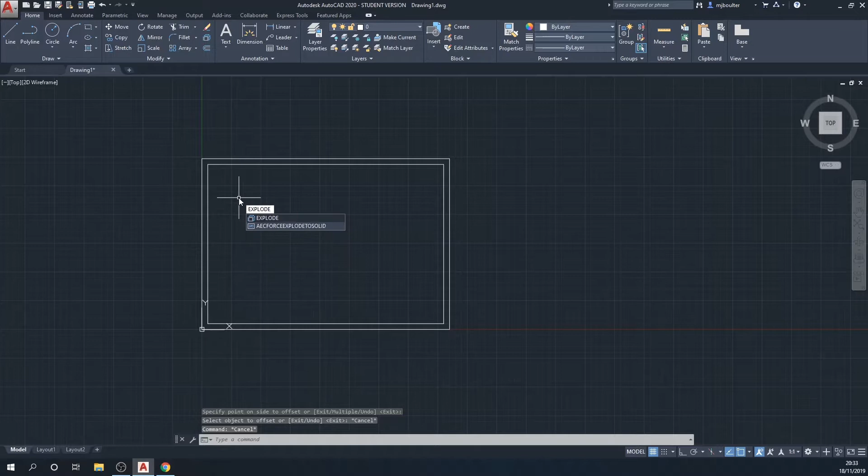I'm going to offset the rectangle in by 10 mil because we need a 10 mil border on top, right hand side and the bottom. So I'll offset that in, and then I'm going to explode that inside rectangle so that I can offset the left hand border in by another 10 mil, so that overall we've got a 20 mil border on the left hand side.

I'm going to trim out the bits on the left hand side so that we've got that 20 mil border. So I'm just going to quickly trim those.

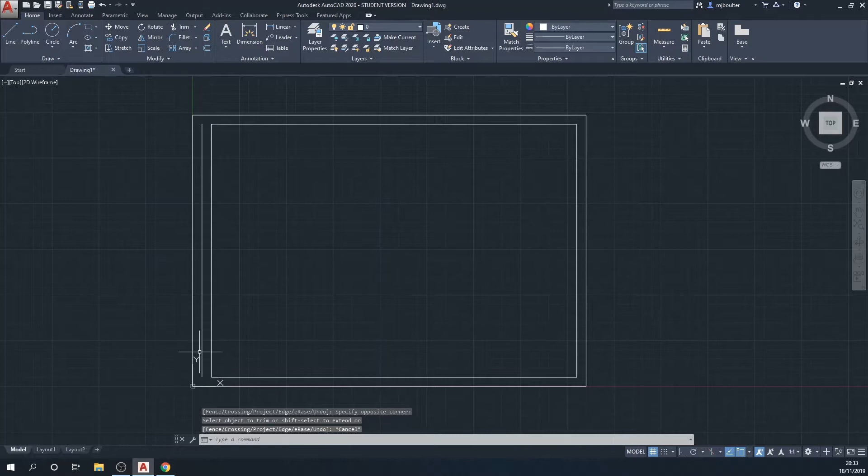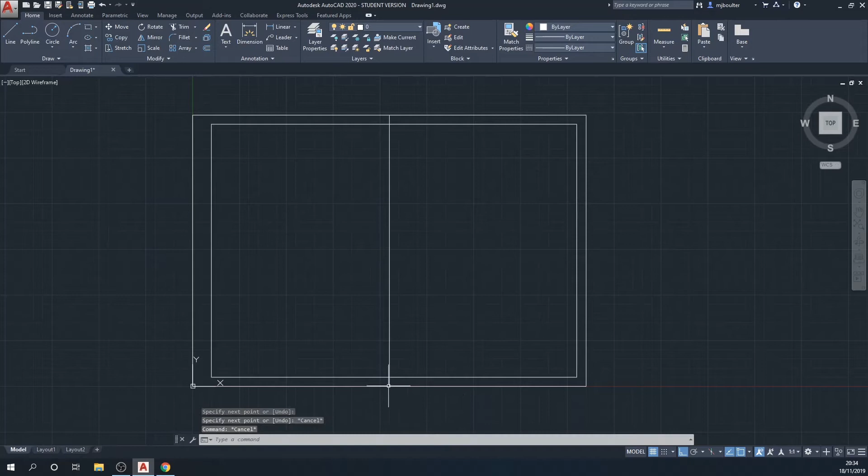There we go. And what I'm going to do now is check for my object snaps, my midpoint, make sure my ortho mode is on, and I'm going to put a vertical line and a horizontal line at the midpoint of the outside rectangle.

We're then going to offset those through 50 mil. I'm going to start with the vertical ones, offset to the left, and then I will offset them to the right. Now I'm going to do the horizontal ones, and I'll go up 50 mil.

We're going to use these to put our numbers and letters, numbers across the top, letters down the side. So I'm going to join the inside rectangle so that I can use my EXTRIM function, joining these lines together.

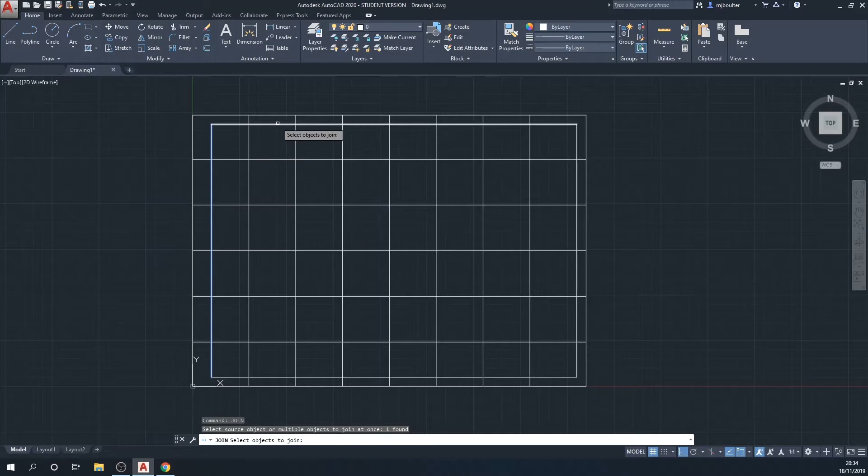Now I'll be able to use the EXTRIM function, selecting the inside rectangle as the trim detail, left click, and then just left click inside the box and it will delete that.

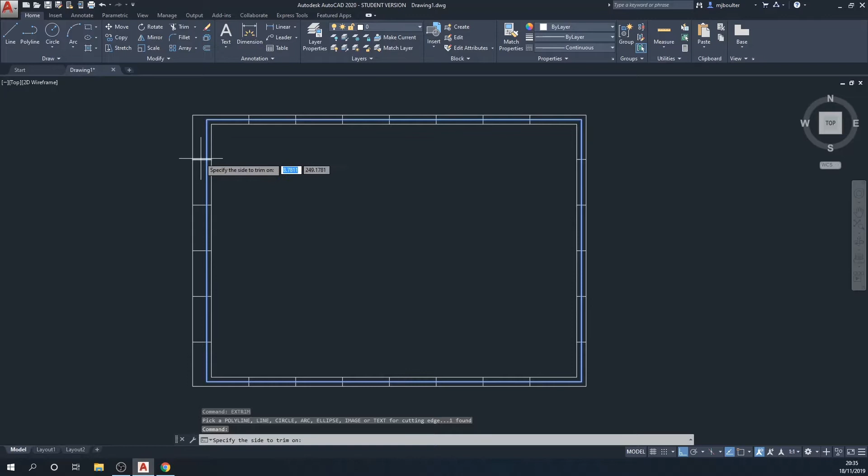I'm now going to offset the inside rectangle by 5 mil, and then I'll use the EXTRIM function to trim out the little element between the outside and that rectangle. I'll then delete that rectangle we've just put in, and there we've got the little 5 mil indentations to denote where our letters and numbers are going to go.

So I'm going to use a multi-line text. It's in the drop down of the text selection box. Select that, and then I'm going to justify that into the middle center. So along the top with numbers, I'm going to go along and put multi-line text boxes in all of the rectangles, numbering 1 through to 8, justifying all of them to middle center.

I was just trying to see if I could copy it there, but I think it's going to be easier if I just carry on doing the multi-line text.

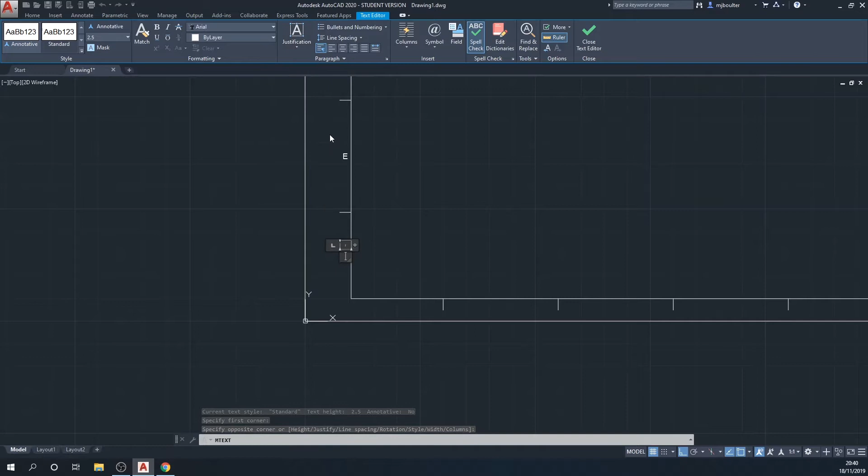So last one to do now, because we'll copy them across. Now I see that I've put two E's there. I will change it in a minute once I've done the copying across.

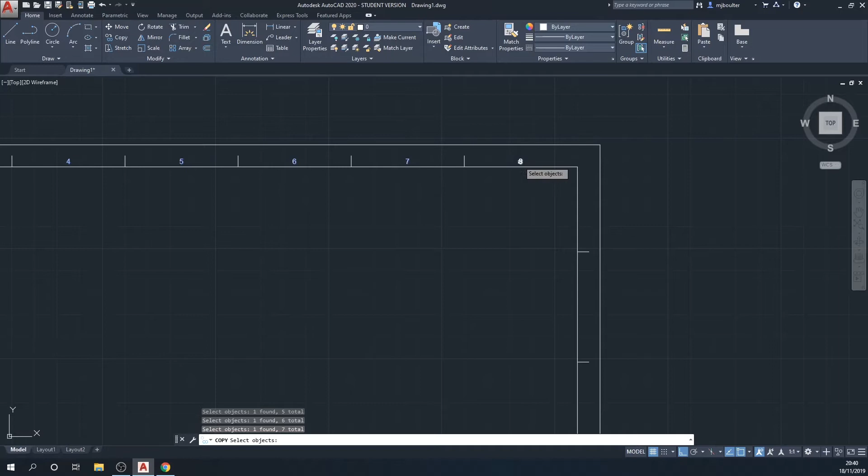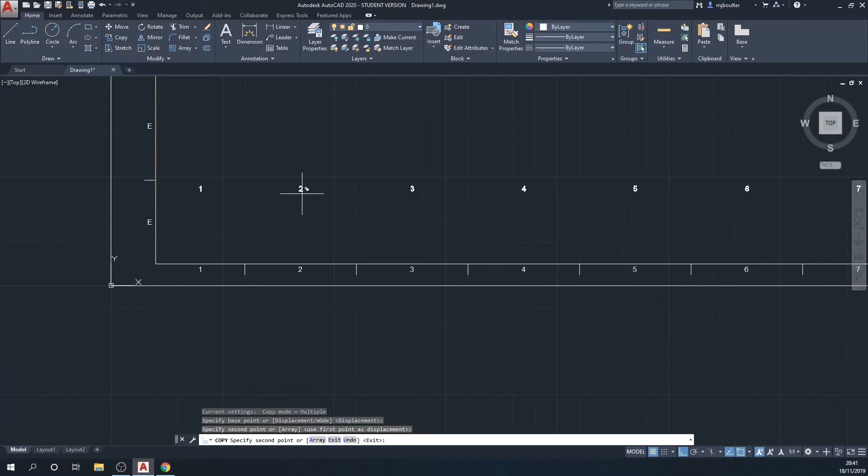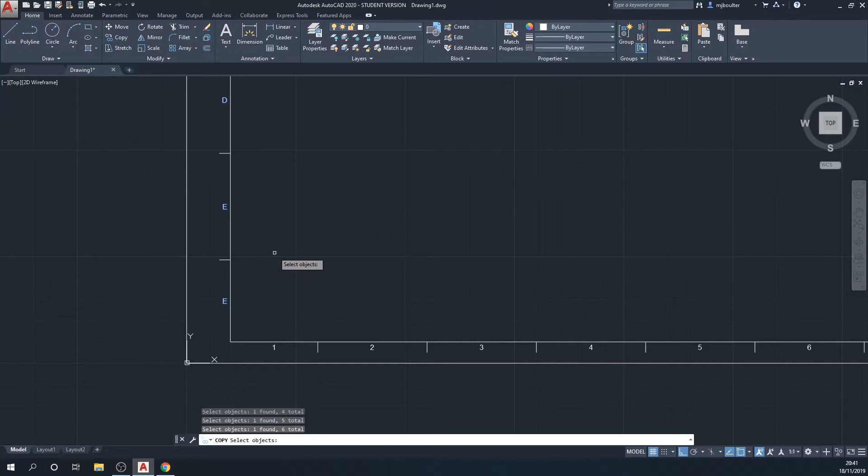And now what I'm going to do is go back and change these to F's. Just double click on them and you'll be able to change it to an F. We'll do that side and we'll do the right hand side.

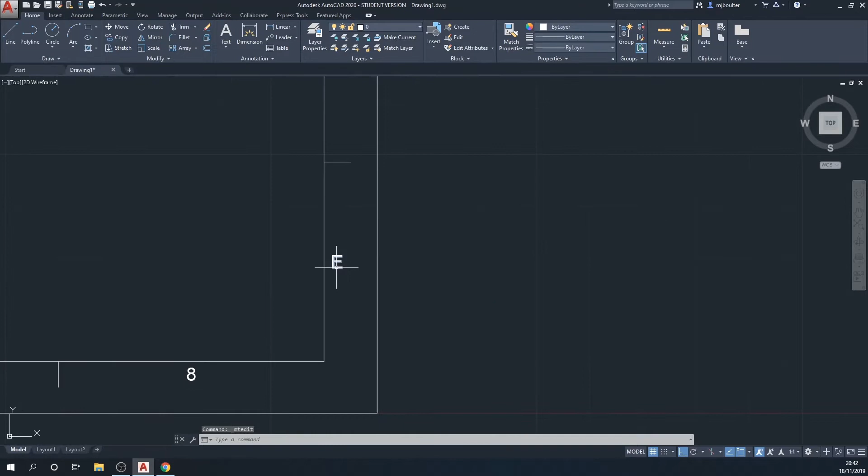So now we need to go on and do our title block. So our title block is another rectangle. This is 180 by 30, but of course we're going back, so it's actually minus 180 by 30. And that will give us our title block.

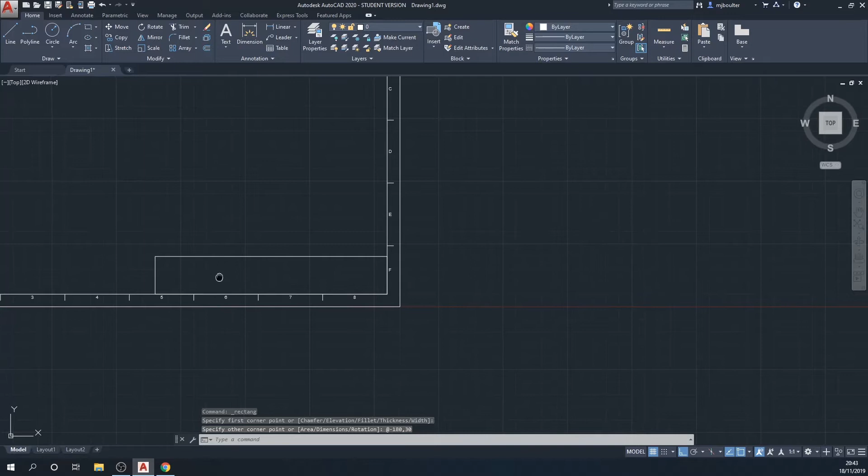I'm going to put in the various offsets now, so I'm going to put a vertical line and then I'm going to do shift right click and use a temporary track point to track in the distance 30 mil and then come down. That creates that rectangular box.

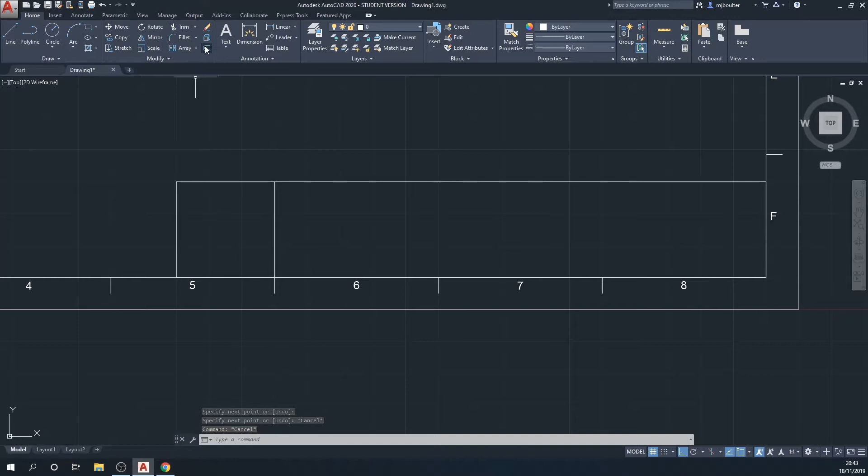I will now use the offset command and I will offset this line in by 40 mil.

I will then offset this line by 35 mil. And then we've got a series of 15 mil offsets, which we'll trim out in a bit. We're going to have 1 15 mil, 2 15 mil, 3 15 mil, and the last one 4 15 mil.

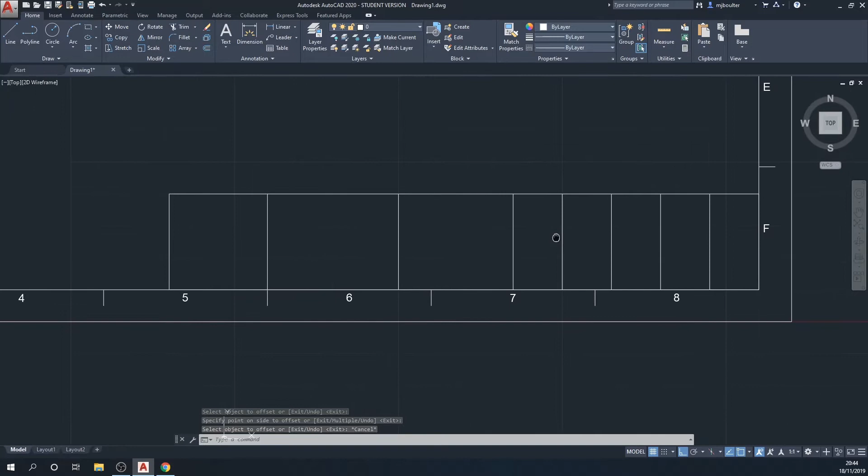In the second box in, I'm going to use a temporary track point again, so shift right click, come down 10 mil and then across. I'll then offset that by 10 mil.

And then I'm going to put a horizontal line through the entire box at the midpoint, and then use the trim function to trim out some of the boxes where those lines aren't needed. So just copy what I'm doing here, copy which boxes need to be trimmed out, and we'll put in our various different titles in a minute.

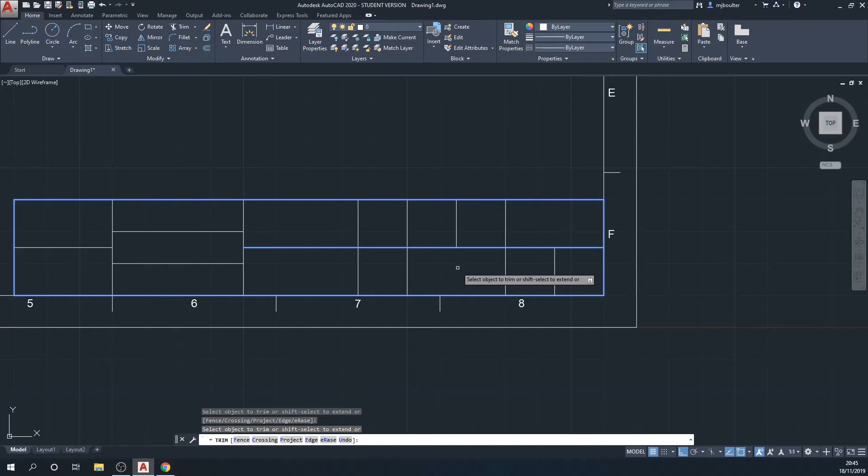The box on the far left here doesn't need a line in at all because that's where our logo is going to go. So we can now start doing our multi-line text again.

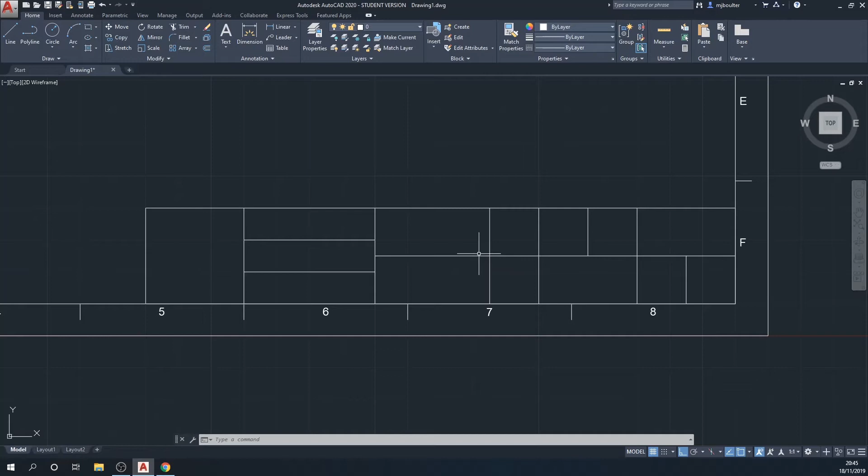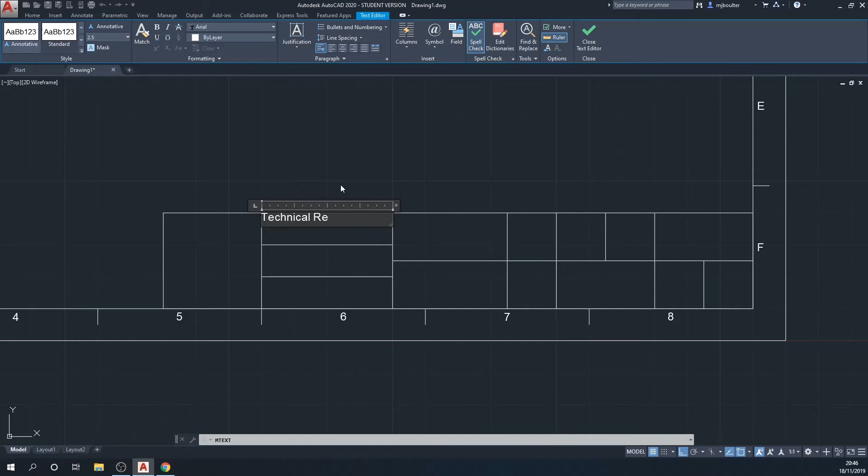So we'll select multi-line text and put a multi-line box into the top here. We're going to keep the justification top left, and we're going to put in 'technical reference' with a capital T and capital R, but the rest lowercase.

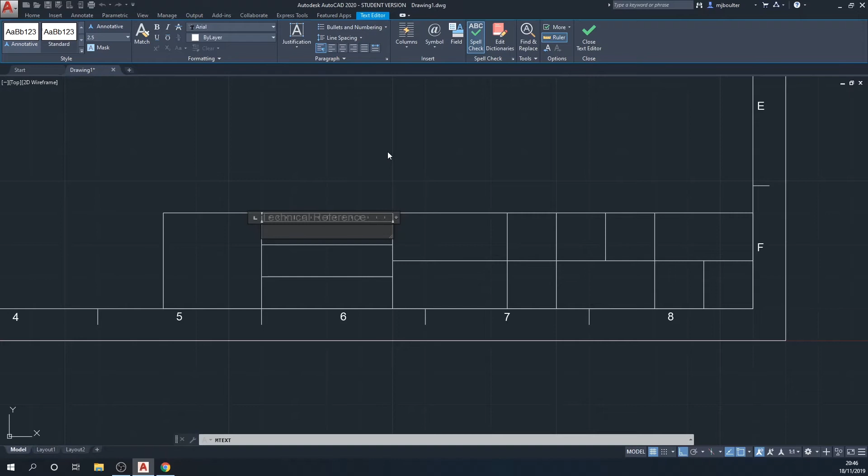And then we'll do another multi-line text box. This one will justify to the left and center, so middle left, and here I'm just going to input the word 'name' in capitals.

As you can see, they're tight up against the corner, but first what we'll do is change the text height of the technical reference from 2.5 to 1 mil.

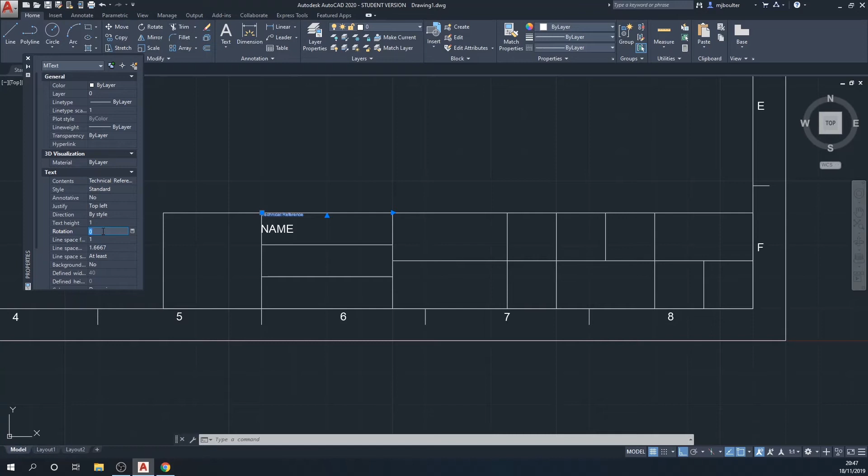Close that window down, and now we just need to move them in because they're tight up against the border. So we'll click the point, move it in 1 mil and down 1 mil for the technical reference, to get it off the border. For the name, we'll just bring it in 1 mil.

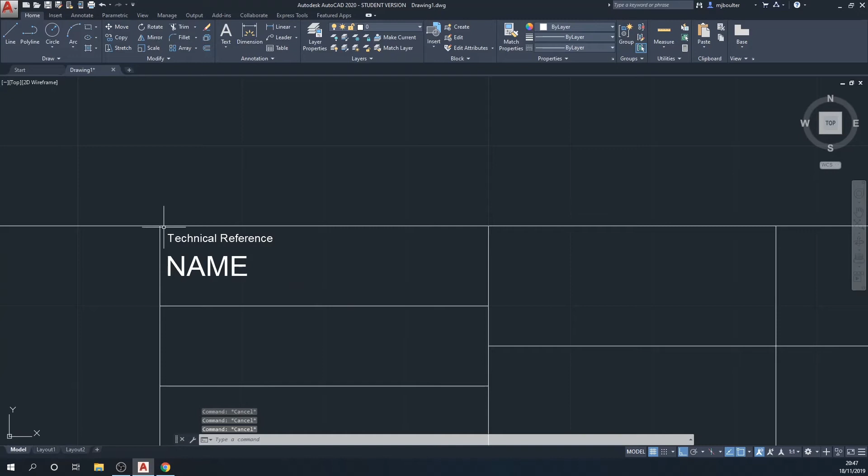Now what we're going to do is copy that into all of the rest of the boxes. So we'll select the corner of the box, and then go around copying them into all of the boxes. Then in a minute we'll come back and change the title of the box.

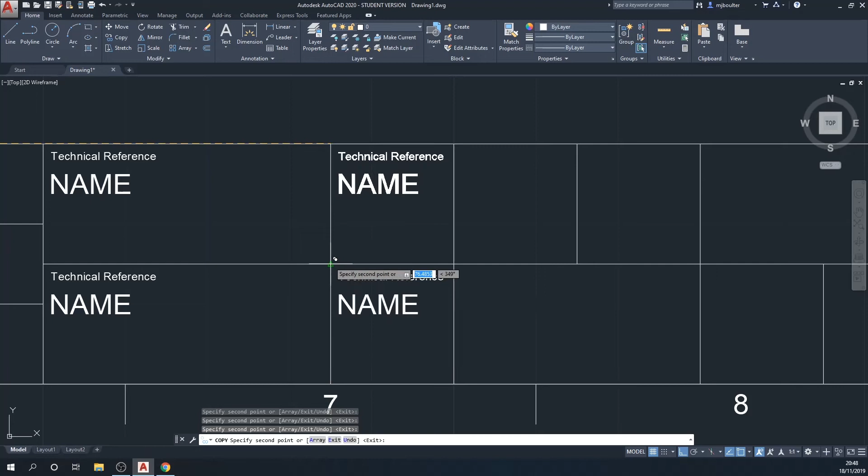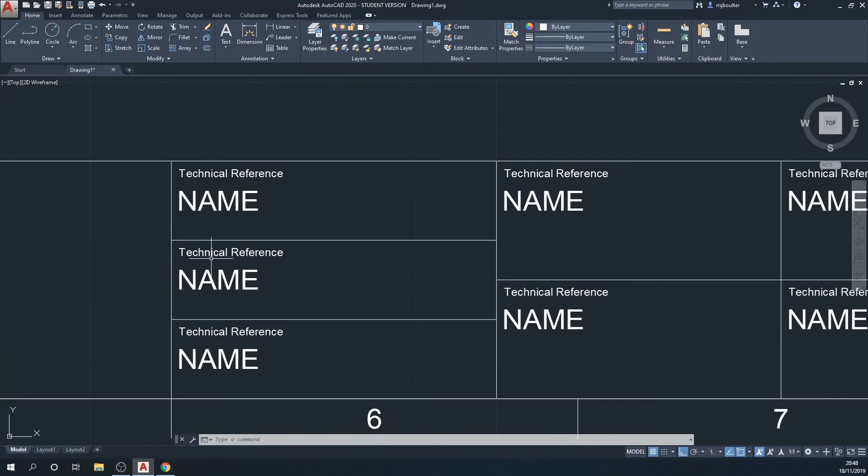There we go. So the second box down, we need to change this to 'created by'. The next box down, we need to change that to 'approved by'.

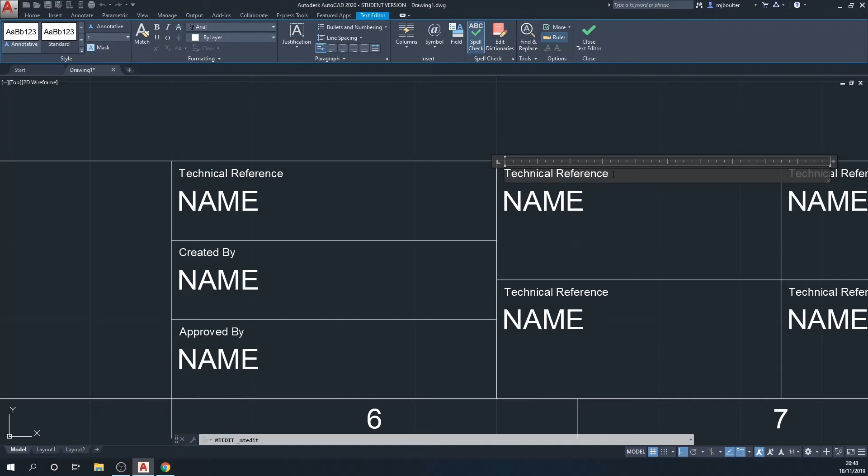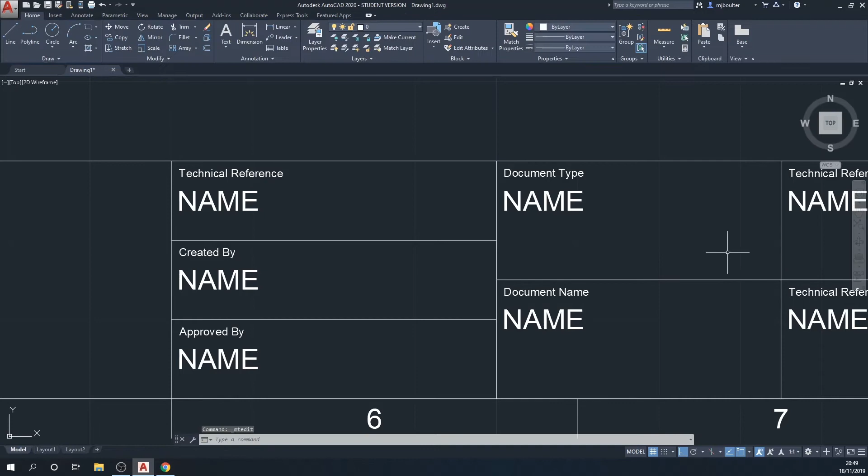Then this next top box will become 'document type', and the box under that will become 'document name'. Now this next top box will be the 'size'.

Then our revision box underneath. This box will become our 'scale'. This box we're going to delete, because that's going to be our third angle projection, which we'll have to draw in a minute. But the box underneath will be 'date'.

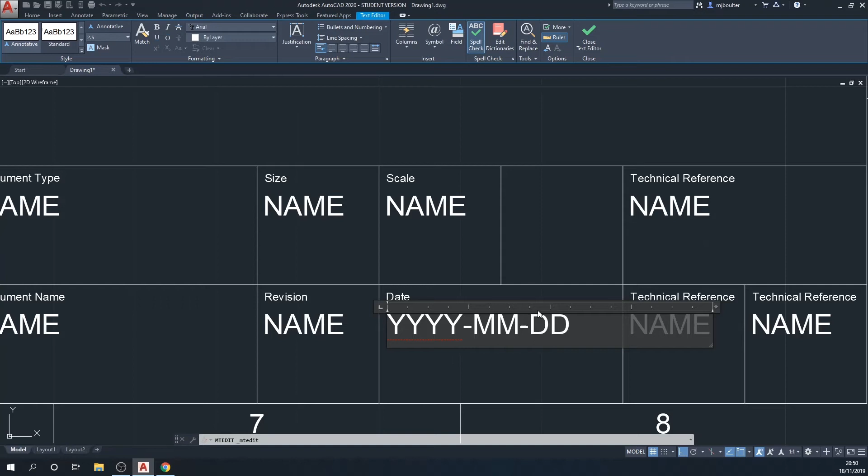And I'm actually going to put in there the format it needs to go in: the year as YYYY, so 2018, 2019, whatever it is, then the month, so 06, 07, and then the day. The final box along the top here will be our part number.

And the last two boxes along the bottom here: this one's 'language', and the box next to it will be 'sheet'.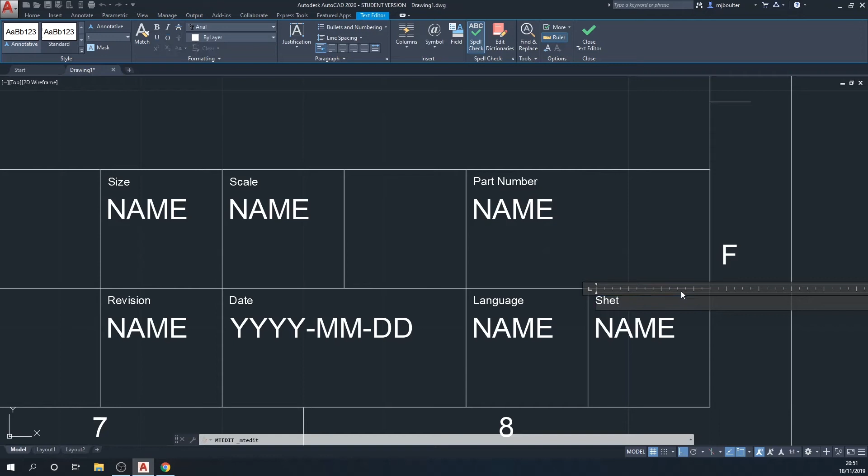Now I'll leave the names as the same. I'll just keep them as 'name', so it will remind you that you need to fill it out when you've done your drawing. But the next section, what we'll do is look at the logo and importing the logo.

So I'm going to go over to Google and select our logo. I'm going to use the City College Plymouth logo. You want one that fills the area, so either a PNG or JPEG. So I'm going to save this to my hard drive.

I think I'll just put it in downloads for a minute. Save it. And then what I'm going to do is go and find that file in File Manager, and I'll right click on it and open with Paint.

Now what I'll do is a Control A and then Control C. Control A is select all, Control C is copy. Come back into AutoCAD and then press Control V, which will then bring it out, and I'll then place the image.

I'll go to Properties. I've got to unlock the aspect ratio, so that needs to say no. The width and the height, we know it's 30mm, both of them, because it has to fit in that box. I can close that down, and now I can move it into that box.

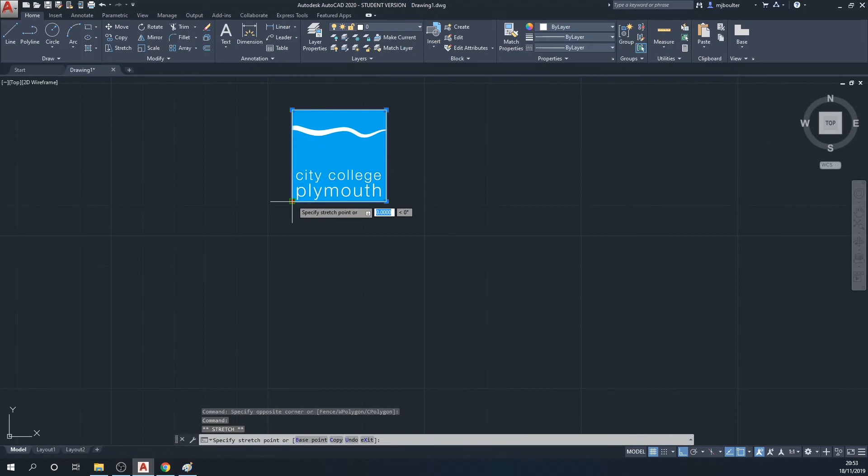Oh, shouldn't have done that, so we'll Control Z that, go back. We'll just select and move the bottom left hand corner, and then copy it into that box there. So the last thing we've got to do now to fill this out is our third angle projection.

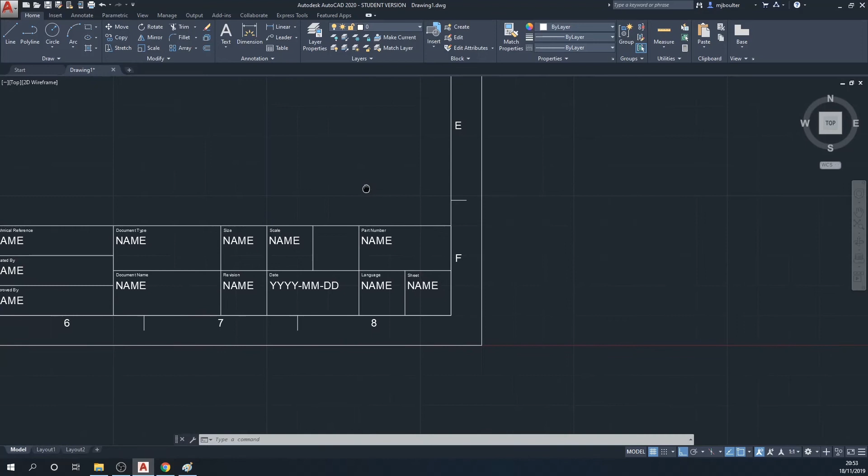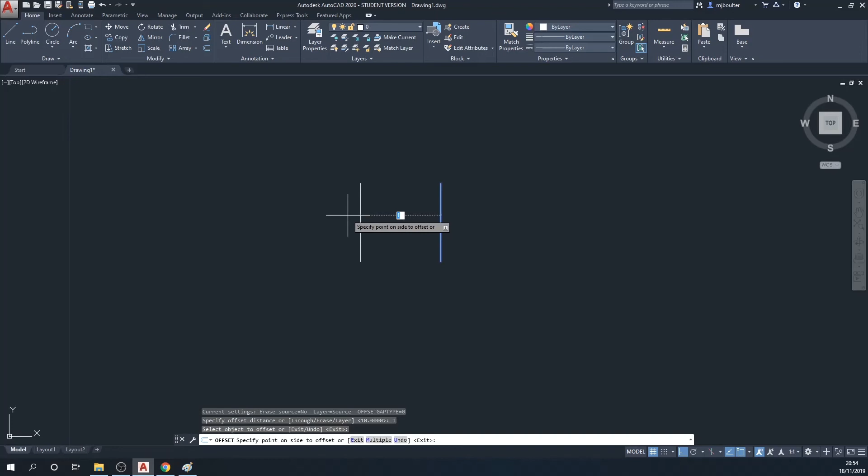So we'll just find an area off the screen, draw a vertical line that is 1mm in height. We're going to offset that by 1mm to the left hand side. Do that again, 1mm. Select the line, offset it 1mm. We then need two lines at 165 degrees.

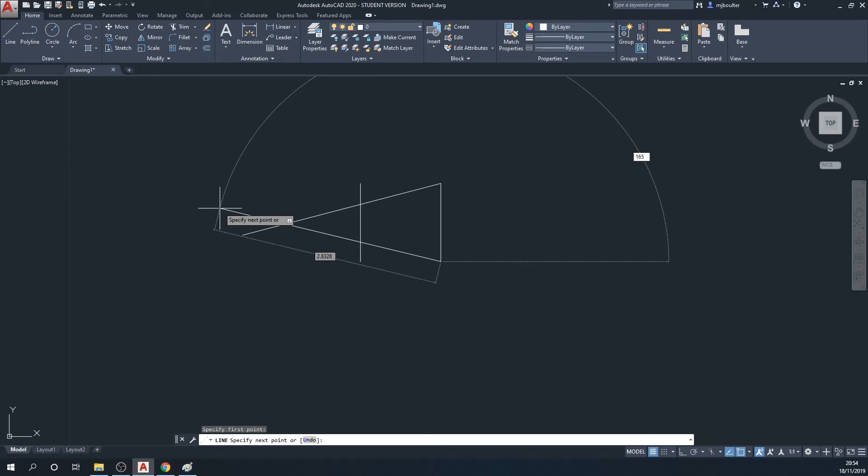I'll just tab across, put in 165, hit enter. Then I'll do another line, 165 degrees, so tab across again, 165, and now I'll trim out some of the lines as I'm showing. So I'll use this line as our trim line, trim that line out and that one. Repeat the trim, so I get rid of these two little sections here and here.

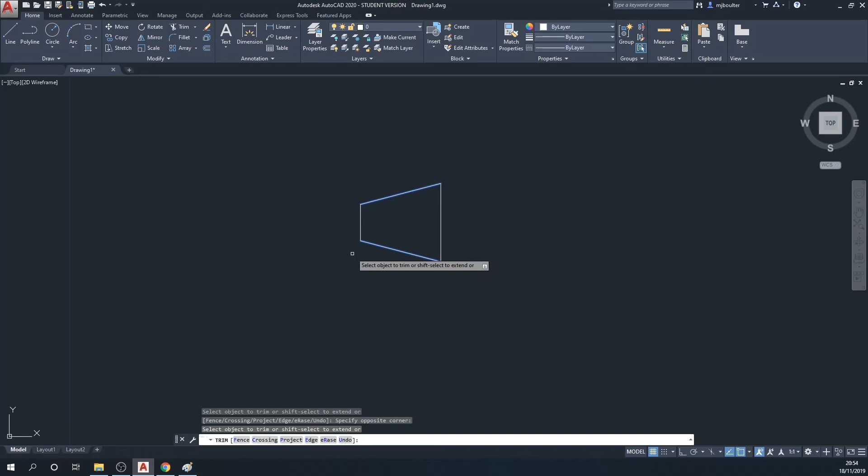And now what I'm going to do is draw a couple of circles, and I'm going to draw them right on the end of this area. I'll put my ortho mode back on for this circle, because what I'll do now is move them off to one side.

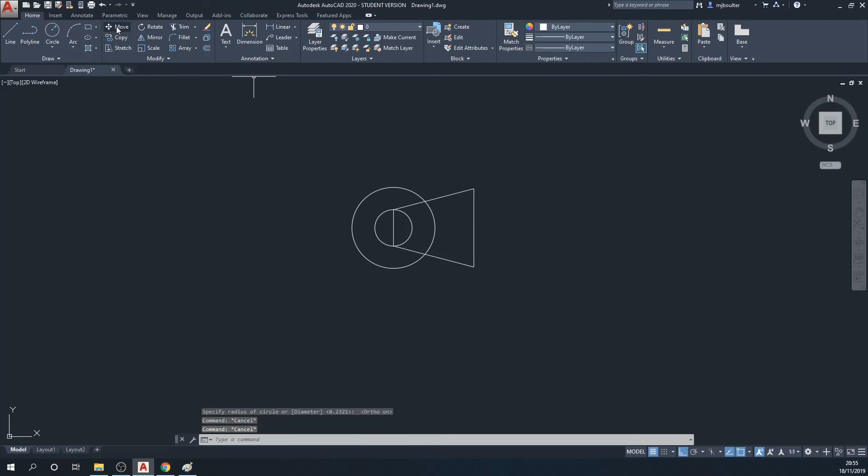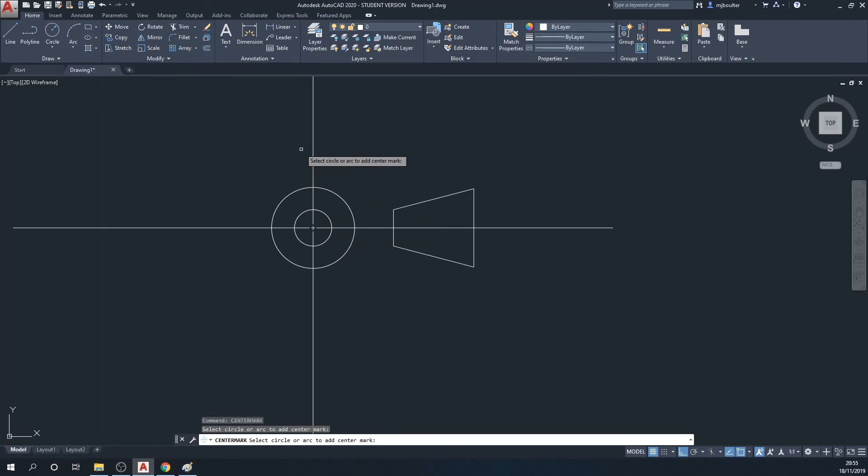So I'll select that circle and the inside circle. My base point will be the middle, and then I'll move it off 1 mil to the left hand side. So now put our centre mark in, so just type in centre mark, select the inside circle. That's great, we've now got our centre mark.

I'll just drag the lines back in a bit. We'll have to pull them back out again in a minute, but it just makes it a little bit easier for moving around. So I've pulled them all back in, those three into 1 mil, and then this right hand side one pulled it back into 2.5 mil.

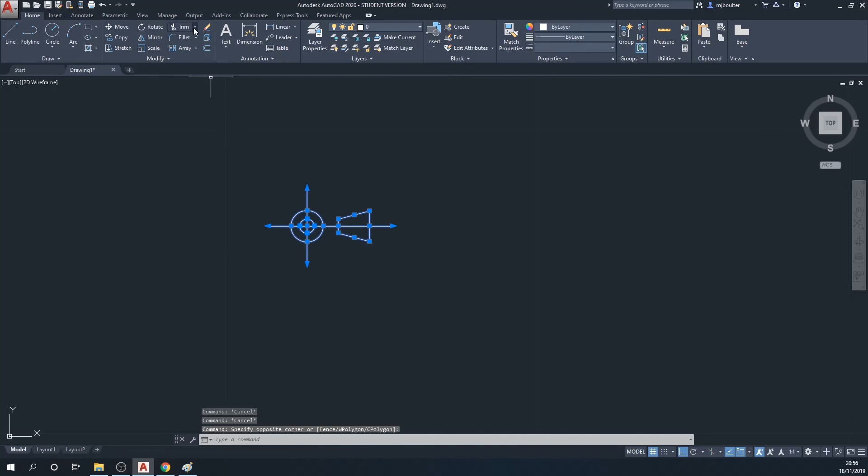So I'm going to select the whole lot now and then go to move. I'm going to do shift right click again and midway between 2 points. Do that quickly again: select it all, click move, shift right click, midway between 2 points, and go midway between these 2 points. Now I've got it in the center there.

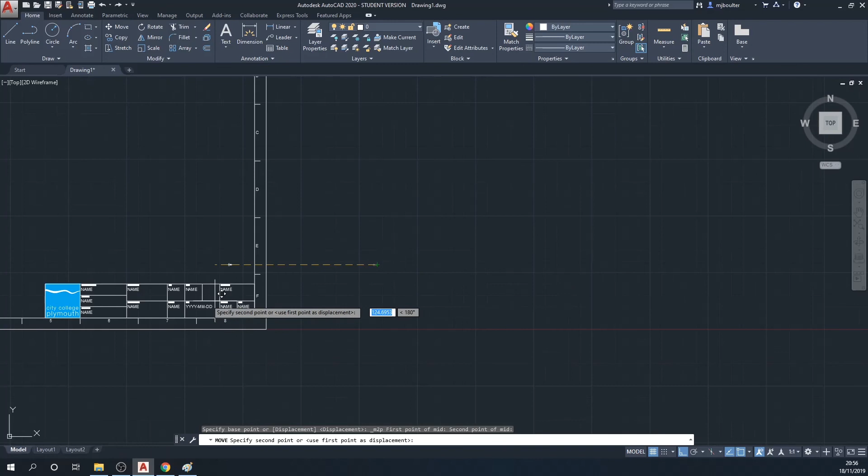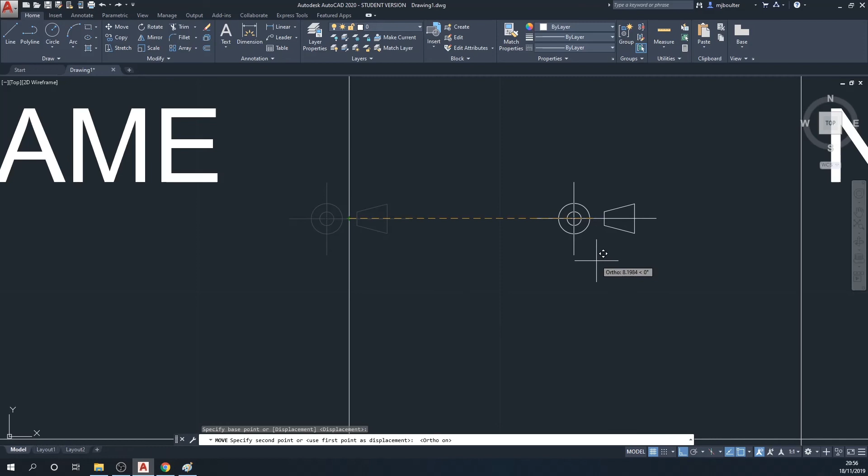I'm going to put it at the midpoint of this vertical line here, and then I'll move it again, offset it, and move it 7.5 mil to the right hand side, which will put it in the middle of that box. Put my ortho mode back on, type in 7.5, and there we go.

So I'm going to select it all now, click scale, then shift right click again, midway between 2 points, between there, and now I can scale it up so that it fills a good portion of the box.

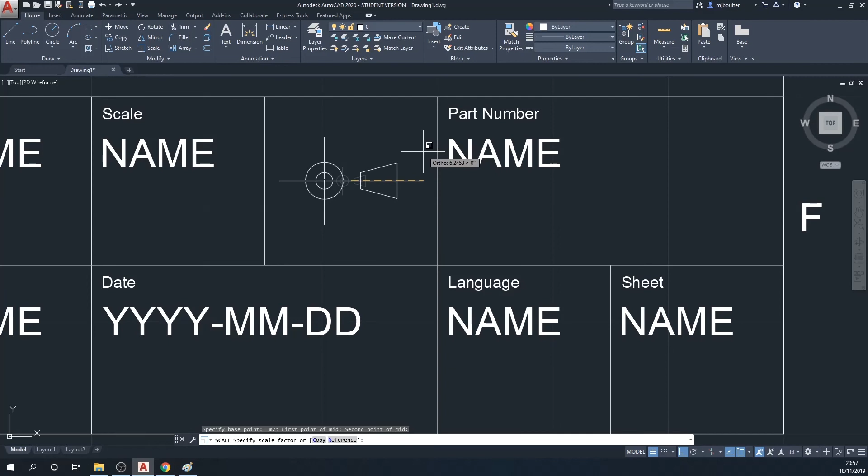And then I'm going to drag the center mark points out by another 1.5 mil on these 3 points. This one will be 6.5 mil.

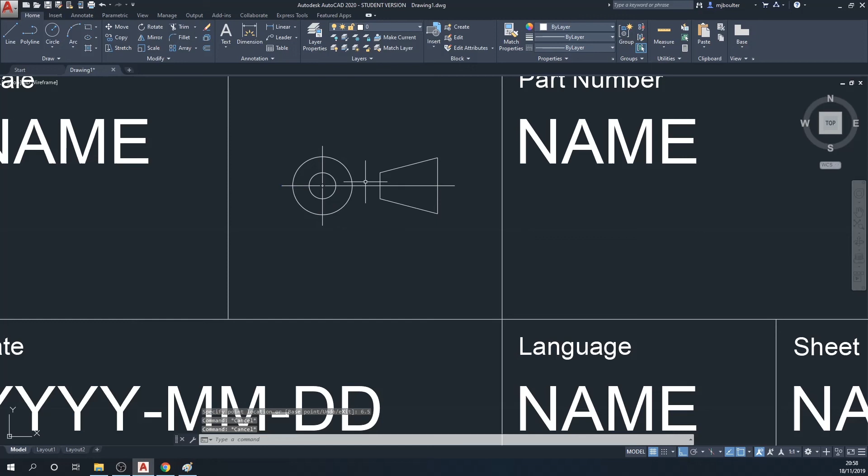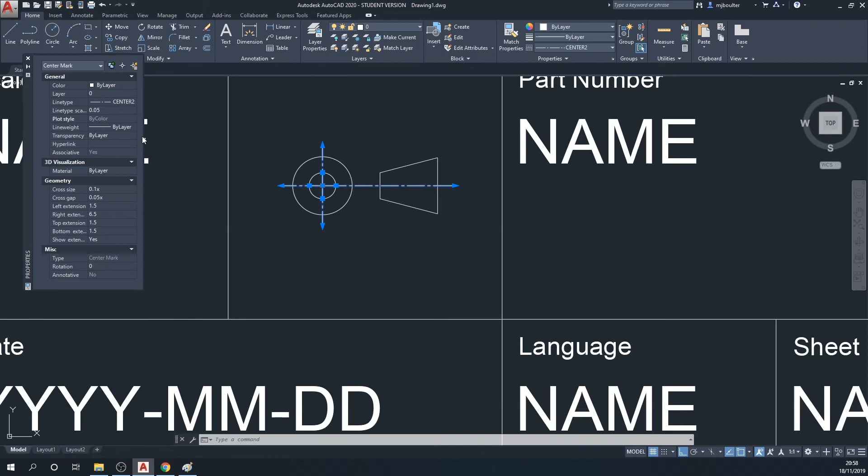Now it should be a dash dot line, so the line type scaling - I'll select it, right click, hit properties, and I now need to change the line type scaling so we can see the dash dots. I think 0.1 is going to be a bit big, so I think we're going to put in 0.05. Yep, that's much better, so that will work for our third angle projection symbol.

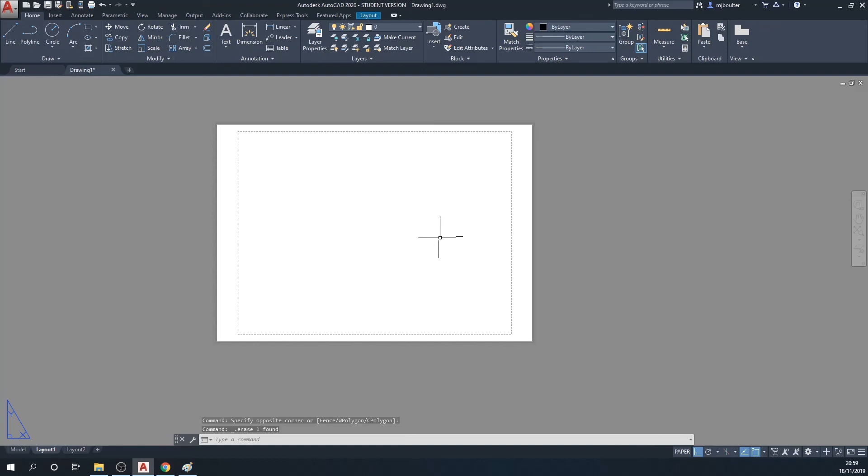So we're now ready to move this into our layout. I'm going to click layout. I'm going to select this and get rid of this for a minute, because this is our viewport box, we don't need that for a minute. We need to change the paper, so the paper space - we do page setup. So we come down to print, page setup, modify our layout 1.

Our print is going to be our DWG to PDF. Our paper will be our ISO full bleed A3, 420 by 297. There it is, click OK. Click close. Now that's the right paper size.

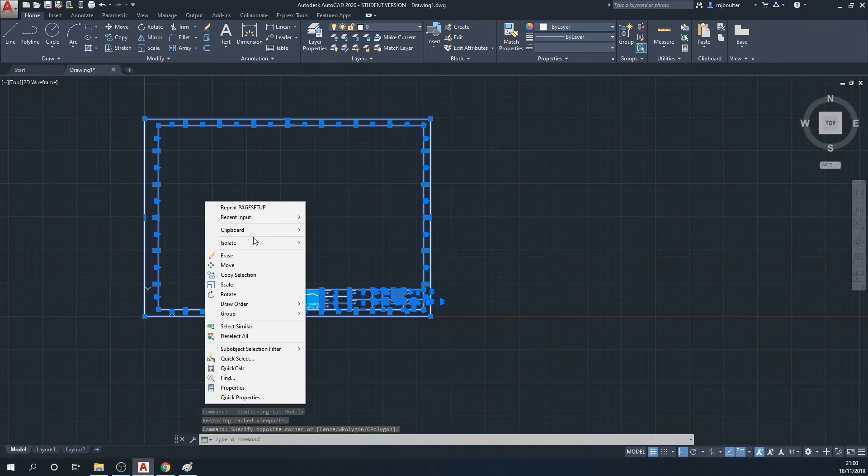So we'll go back into our model space, highlight the entire work, and then do right click, clipboard, copy with base point, select the bottom left hand corner, go back into our layout. We'll then do Control V, which will paste it. We've got to zoom in and line this corner up as best we can, because there's no object snaps here. There we go, that's in our layout.

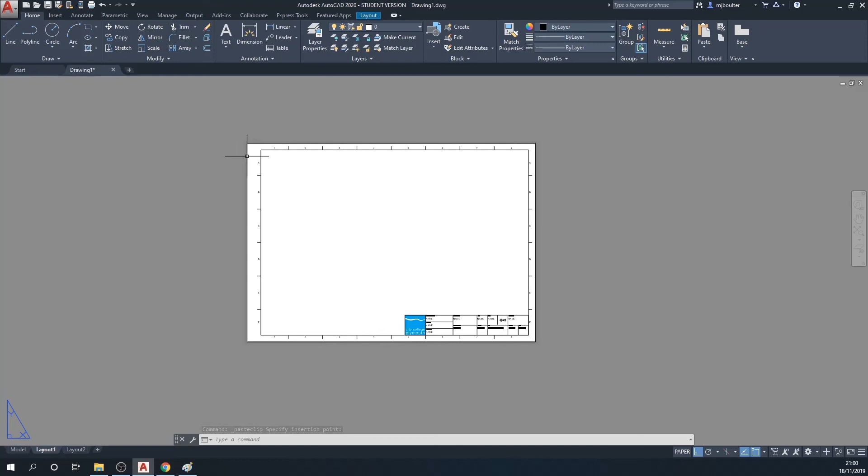We'll delete the outside rectangle, because that's just going to be over the edge of the paper. So this is our drawing layout done. Click back into model, delete our model, and then we'll go and save it as a DWT file onto a memory stick. So I'll find my memory stick in the drop down. There we go, down there. And we will save it as BS8888 A3 template, so I know that that's the British Standard template I'm going to use from now on.

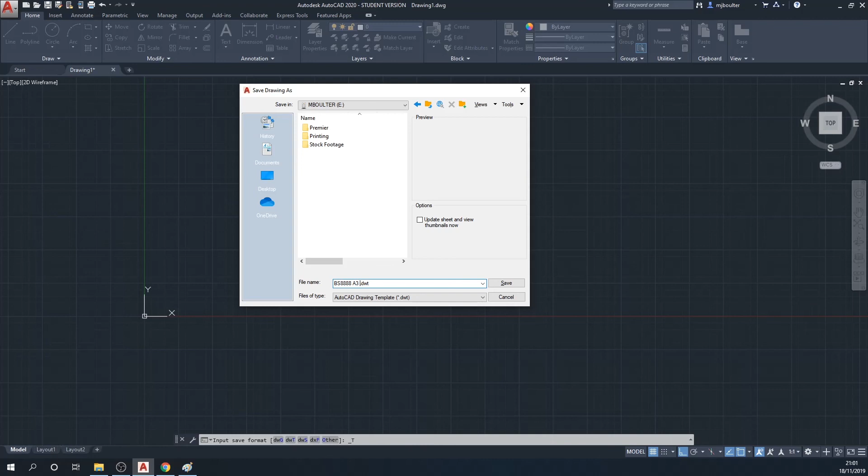So this is the end of this tutorial. I hope you've got all of it.